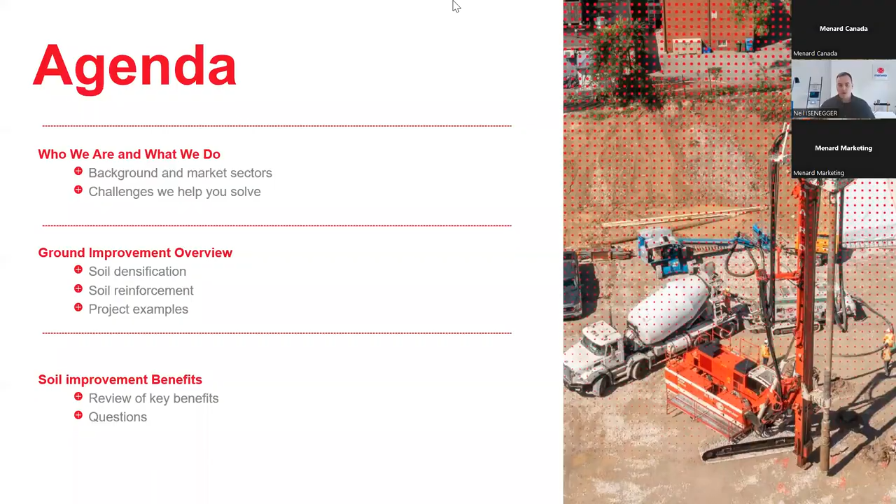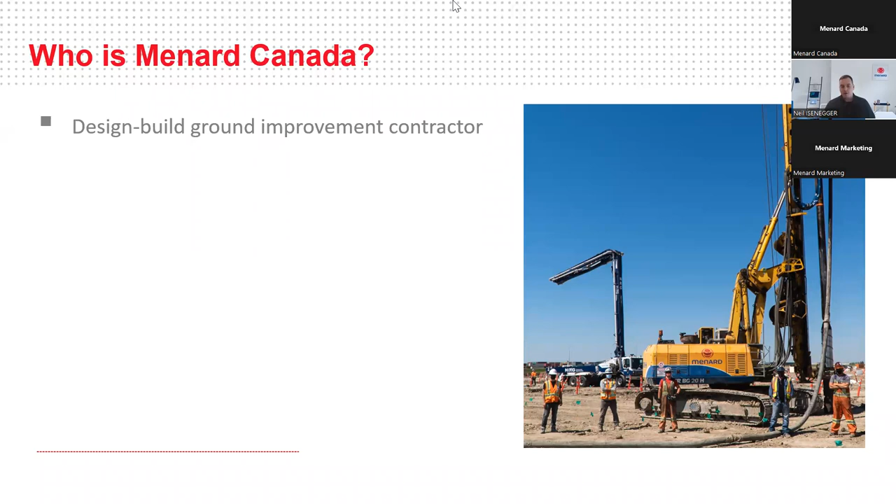So Menard Canada, who are we? What problems do we solve? Menard is a design-build ground improvement contractor, formerly Geopac here in Canada, established in 1971. Geopac was the first licensed user of the Menard pressuremeter here in Canada, a technique invented by Menard's founder, Louis Menard, back in 1955, and patented that same year.

There's been quite a bit of development since, and this was a revolutionary way to better understand the in-situ strength and stiffness properties of soil, allowing us to treat them in ways that didn't require massive bulk excavation of poor soils or more costly deep foundation systems.

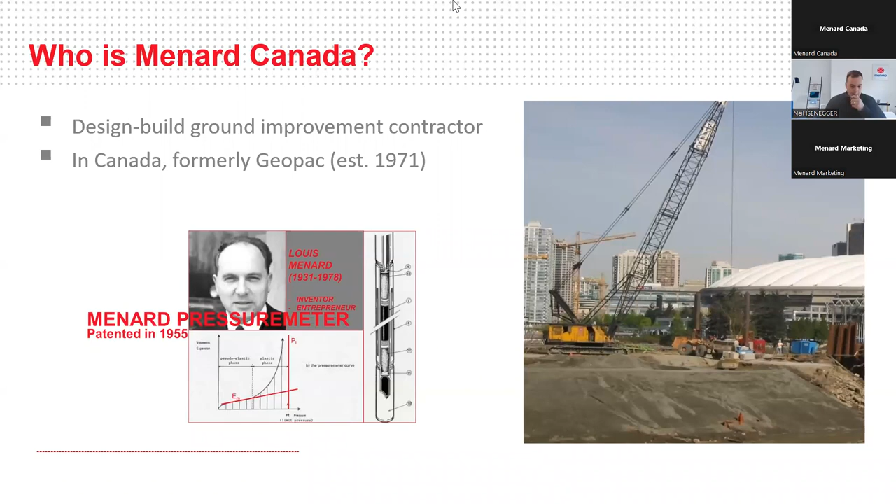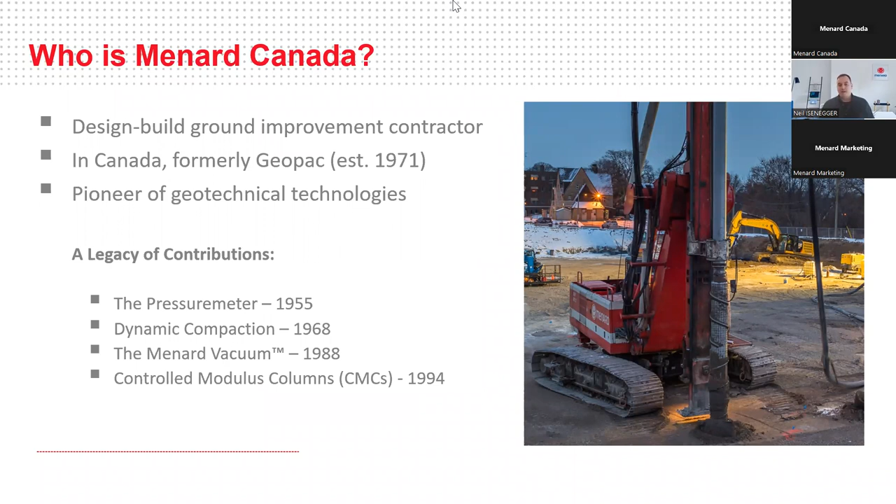So this instrumentation opened up a lot of opportunity for techniques like you see here, dynamic compaction - we'll explain what that is. That's an exciting project in Vancouver from back in our history. Menard Canada has pioneered a lot of geotechnical technologies here in Canada: the pressuremeter, of course, brought in 1971, dynamic compaction followed after that, Menard vacuum, which is a consolidation technique for dealing with soft soils, and then controlled modulus columns, when we start getting into concrete-based ground improvement methods, in the mid 1990s.

Currently, Menard Canada has several offices, coast to coast. We're your ground improvement team, whether you're out in BC, the East Coast, or anywhere in between - offices in Vancouver, Kelowna, Calgary, Hamilton, where we're presenting from today, Toronto, Ottawa, and Montreal, with great teams of folks here that are very approachable. If you have any questions after this, or would like to talk with someone more local, check out our website, there's contact details there. Don't hesitate to reach out, you'll be in very good hands.

So what type of jobs do we get involved in? When it comes to ground improvement, we're focused on soil conditions, which could be below buildings, below roads, railways, industrial facilities, even marine facilities, ports, airports. The application is really almost as wide as would be available. If you have poor soils, there's something that may be able to be done more effectively, and we'll get into how we manage that in a second.

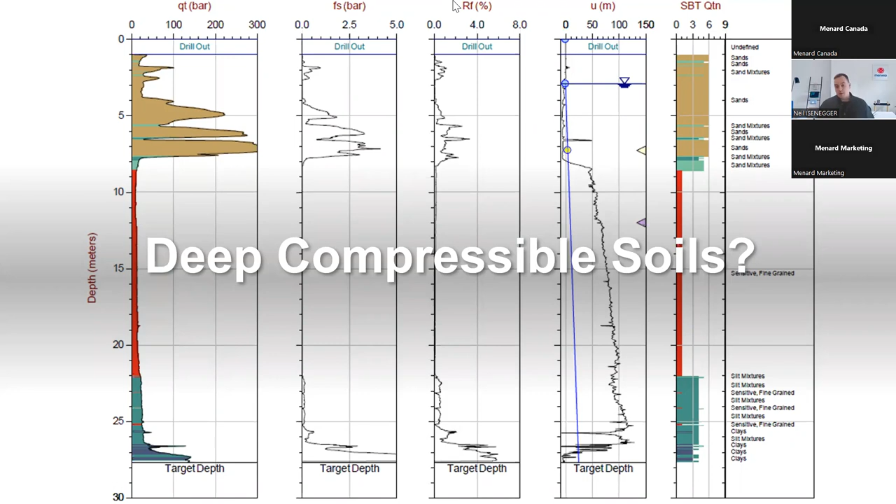So before we get into the creative solutions, let's talk about some of the traditional techniques. When you have challenging soils on your site, typically your recommendations are going to be to bulk excavate, removing all that poor soil and replacing it with engineered fill.

This is a technique that works well. It's been used a lot on a lot of projects all over the world, but it does have some associated costs, challenges, and risks with it.

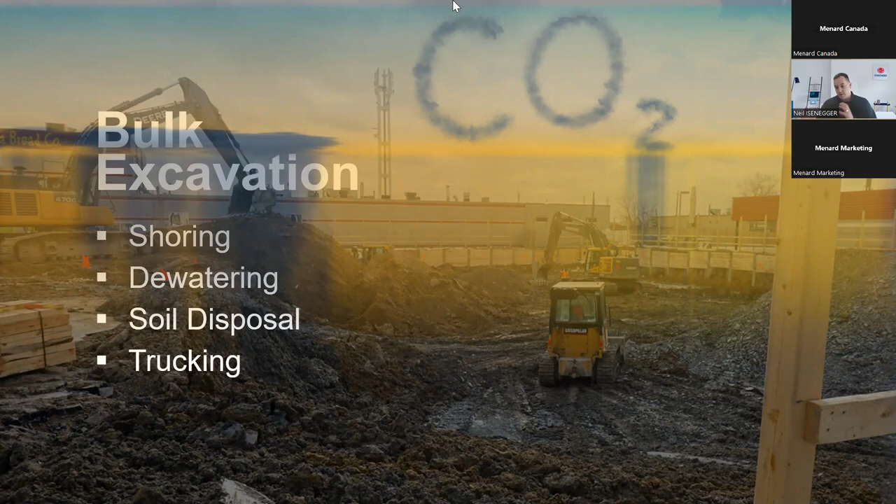You might have high groundwater conditions that force you into dewatering, again adding cost and complexity to the works. Now you're also adding soil disposal and trucking, which not only congests the road and upsets local communities, but also generates quite a lot of carbon emissions, which everyone is very focused on now—understanding what our carbon emissions are, where we are now, and how we can get them to a level significantly lower than where they've been in the past.

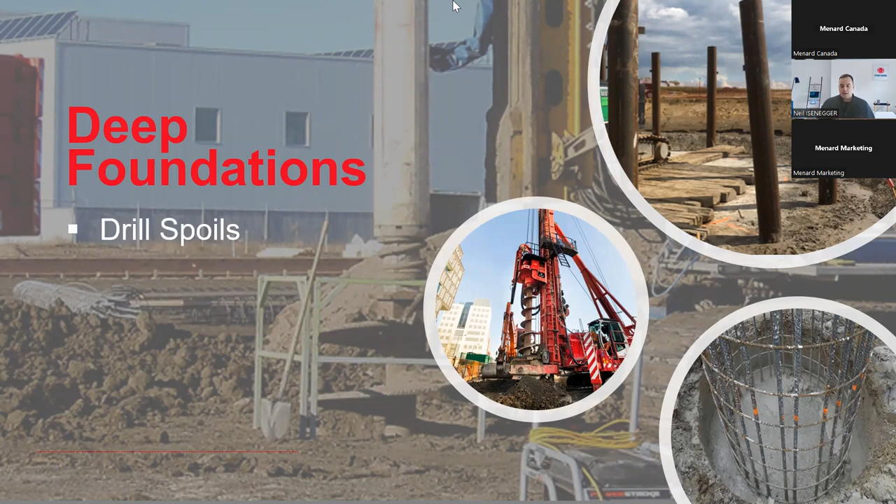The other option you're often presented with would be deep foundations—whether this is a driven pile, maybe a helical pile, drilled caissons, or continuous flight augers. A lot of these methods, not all of them, but a lot of them will generate drill spoil, so you're still pulling up quite a lot of material out of the ground.

That material needs to find a home—that's getting back into the trucking and congestion. They also have higher material inputs in terms of steel, concrete, or grout.

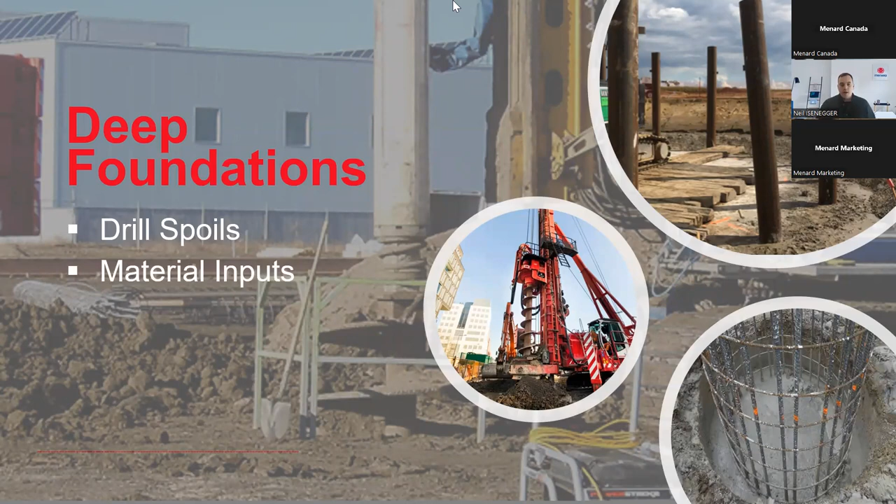And then structurally, they're going to require things like pile caps, grade beams, and structural slabs, which are more costly and take a little bit longer to execute on site than conventional foundations.

So what do conventional foundations look like? Shallow foundations, as you can see in the back, are pretty straightforward—less excavation, fewer material inputs. The idea is to limit the amount of concrete and limit the amount of reinforcement that you need.

Of course, these are going to be dependent on the existing ground conditions. These are faster and more economical to install than pile caps, grade beams, or structural slabs, and they can often be installed by contractors who may not have the same level of sophistication you'd want for more complex piling-type approaches.

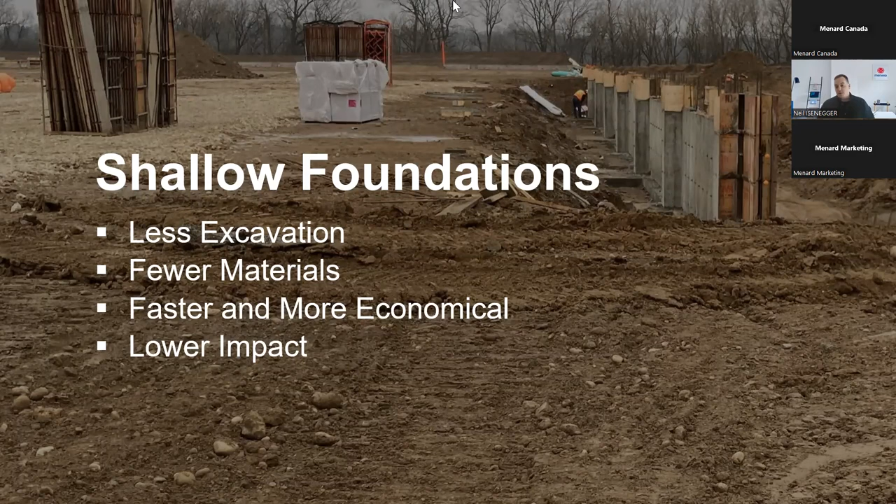Speaking of environmental impact, this is your lower impact option. If you can get away with high capacity strip and spread footings on your project, placed as high in elevation as possible, that's going to be the lowest impact to the environment, the lowest impact to your project costs, and the lowest impact to your project schedule. But could this be a reality?

Could shallow foundations be a reality when you're dealing with challenging soils on site? That's where ground improvement comes in. So let's take a bit of a step back now—we've introduced the topic, let's talk a little bit more deeply.

What is ground improvement? It's a name used to describe a number of construction techniques that use mechanical means to improve poor soil conditions.

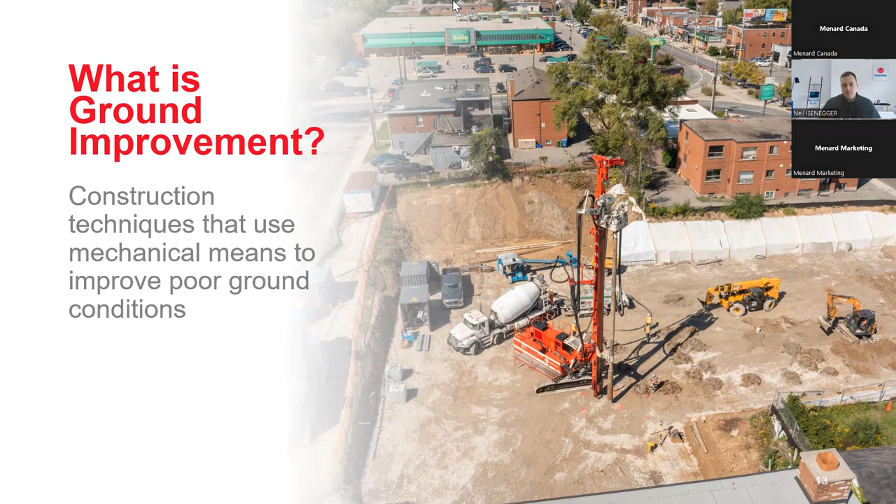You may be looking to improve the strength and stability of your site. Perhaps you have a concern about the total or differential settlement that would occur if you're going to place a new building on poor soils—maybe it's a roadway embankment, a retaining wall, or a new storage tank.

You may also have concerns with loose soils having liquefaction potential—seismic events causing settlement challenges—and, as mentioned with retaining walls and embankments, making sure the site has the stability to support those embankments without failures. I think everyone has probably seen some examples in the world of these kinds of failures.

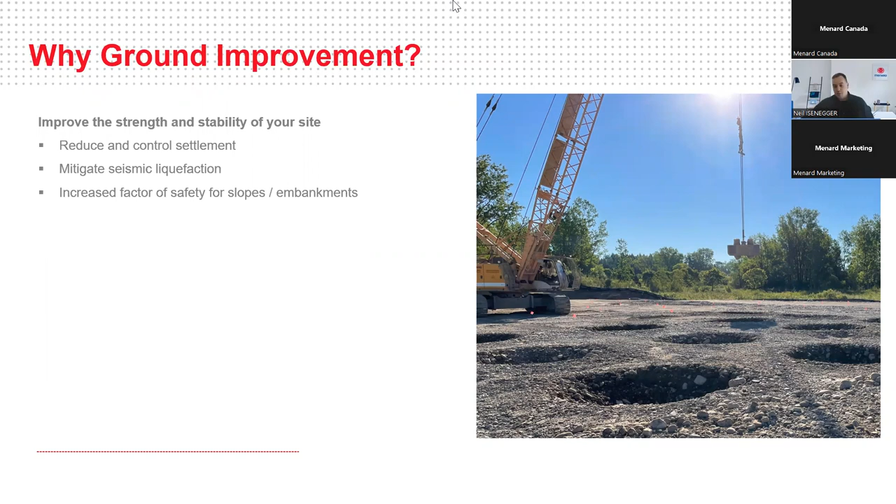The idea here is if you can manage the risk below what you're trying to put on using techniques like ground improvement techniques, you can save a lot of time and money, but you can also achieve what you're trying to do in terms of project performance and the long-term stability of these sites.

Ground improvement also allows you to simplify your construction. If you significantly limit the amount of excess soil generated from a bulk excavation or a drilled caisson, that means less trucking off your site and less coordination. Here in Ontario, the new excess soil regulations are very prescriptive about how you have to manage excess soil, so the less of it you generate, the easier it is, and this generally correlates directly with the economic impacts of the project.

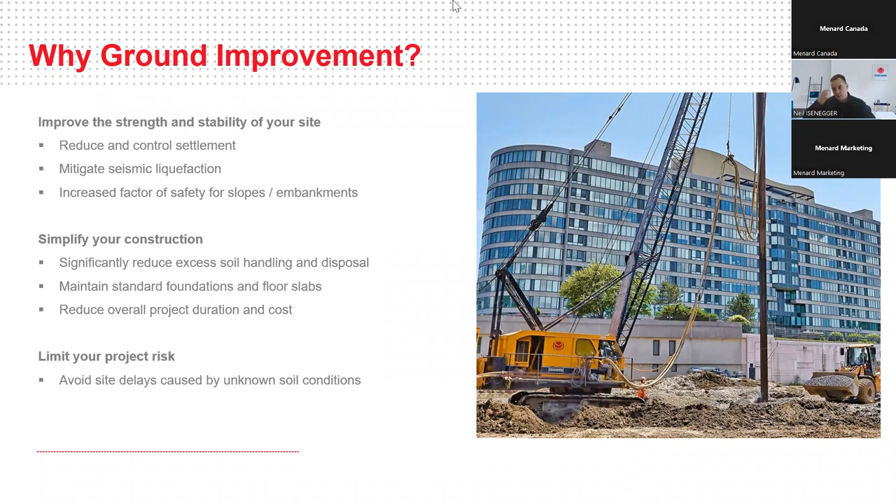The bigger one, I think, is just limiting your overall risk. Anytime you're dealing with the ground, there's always inherent risk. There's no way to know 100% of everything that exists below a building or below a property. If you can reinforce, strengthen, or stiffen that, homogenize the site and make it all consistent, you reduce a lot of risk on your projects. That means when you go to construct, you're not coming up with surprises you need to manage, which are often more costly and have significant impacts to projects in terms of delays and economic factors.

There are a lot of different ground improvement techniques. We won't have time to cover them all today—this is more of a general overview of some of the main techniques being used here in Canada. These methods can generally be broken down into reinforcement techniques, where you're adding some sort of material into the soil to improve its properties; densification techniques, which use energy to change the nature of the soil; or consolidation and drainage techniques, which help on compressible sites when you have soft clays and you're adding new load and worried about long-term settlements.

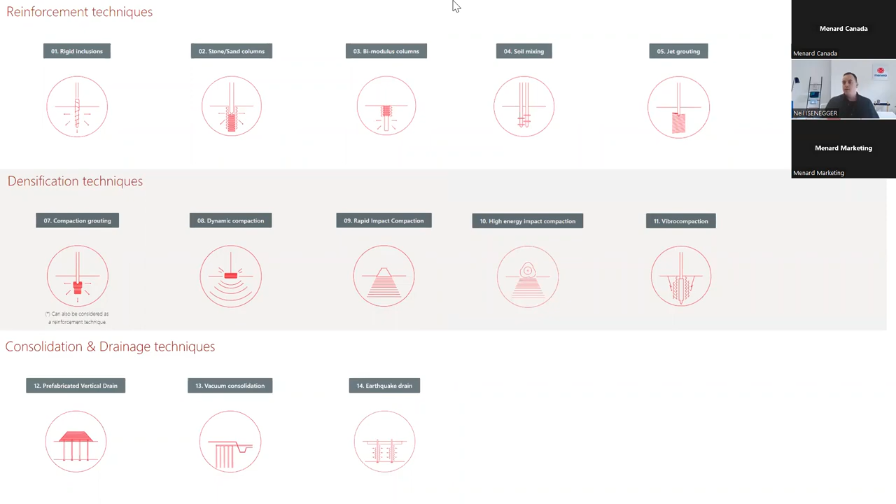So we'll talk quickly first about soil densification. The idea here, as we mentioned, is to simply stabilize loose soils. This could be viewed as your engineered fill or your bulk excavation, really without ever putting shovels in the ground. Instead of removing all this soil, putting it back in lifts, or bringing in import material, you can densify what's there in place, get to the same capacities, and save a lot of risk on the site.

There are a number of different ways to do this, and we'll show a couple of options where the energy increases as we go. What you see here first is a system called rapid impact compaction. This is generally a 9-ton hydraulic hammer that can strike a 5-foot diameter tamper foot in contact with the ground at a rate of about 40 times a minute, which can treat loose fills and loose sands to a reasonable depth below that tamper foot.

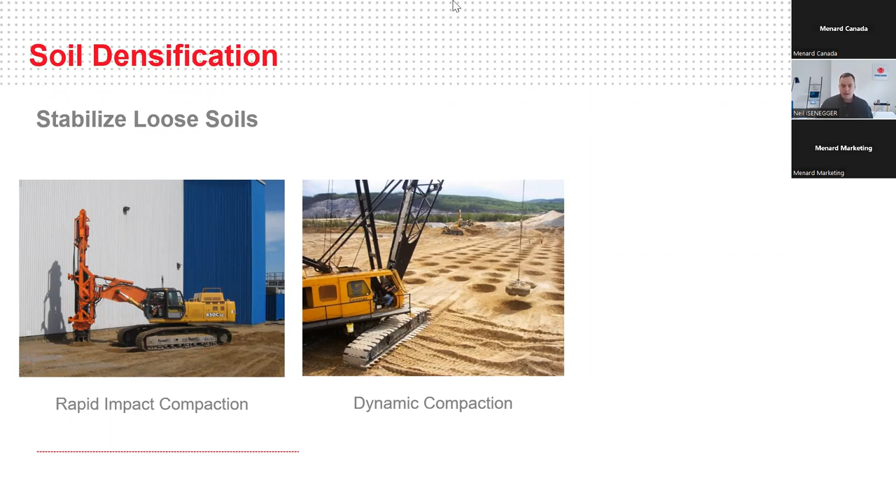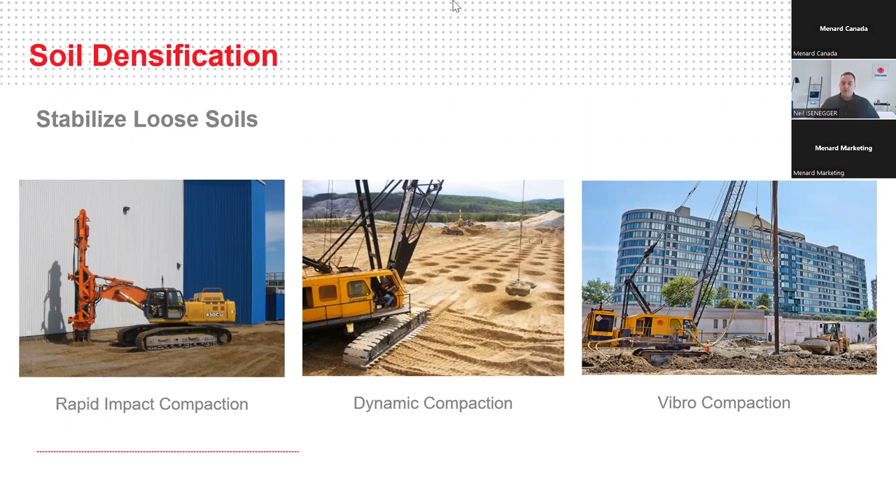As the energy increases, you get into techniques like dynamic compaction, which we mentioned was one of the first ground improvement techniques brought to Canada by Menard, when we were formerly Geopac. And then vibro compaction—so again, going from excavator-mounted equipment into medium-sized cranes, to maybe larger-sized cranes, to manage different risks and different soil profiles.

I like this graph because it gives a sort of indication. We talked about the increase of energy, but what you can see is your typical roller compaction, or that heavy proof roll you do on site, may densify the upper foot or two of the soil. Rapid impact compaction, for example, will extend that to maybe 5 or 6 meters in the right soil conditions. Dynamic compaction allows you to double that treatment depth down to maybe 12 meters or deeper. And then vibro compaction...

Vibro compaction really is, if you've got soils deep enough and a crane with enough cabling, you can get the job done. Our teams on the West Coast are doing a lot of vibro densification to manage liquefaction risk throughout BC, and a lot of their techniques are going down 20, 30 plus meters using vibro flots on cranes.

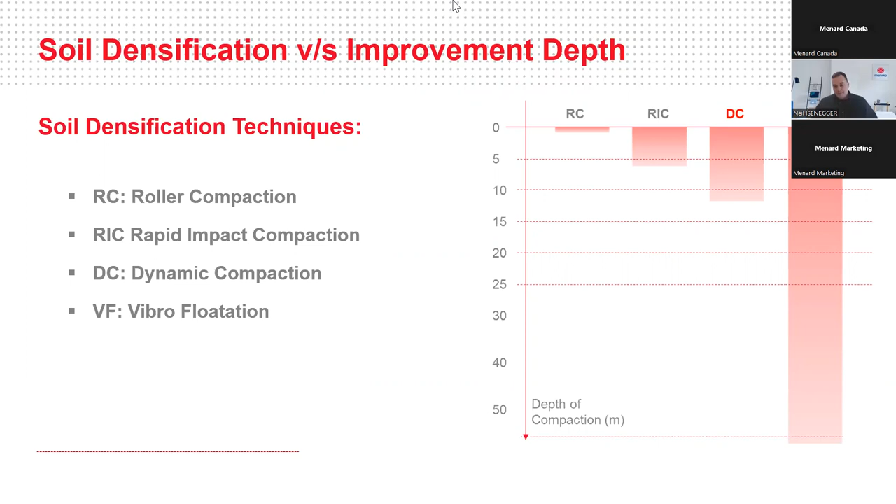So a quick example here—this is an industrial warehouse in southwestern Ontario. This site was a former gravel pit. I think there's starting to be a bit of a trend with some of these former pits and quarries being redeveloped and turned into some beneficial use, which is really great to see—a lot of awesome opportunity there. But this particular site had about 5 meters of fill that had been brought in, plus some weak soils below it.

Dynamic compaction was used to densify the entire site, plus some new fill that was required to bring it to final site grades, and it avoided over 75,000 cubic meters of removals. Think about the number of trucks needed to haul this material off, or the equipment required to manage sorting and recompaction of this soil, versus placing a single crane on the job site working for a couple of weeks to get the job done.

We did a very detailed carbon emission analysis of this project using a third-party calculator available from the Deep Foundations Institute online. Folks can look that up if they're interested in knowing the carbon emissions of their projects, maybe comparing piling solutions or dig and replace with ground improvement options. This particular site had less than one-tenth the carbon emissions of the proposed earthworks, and in fact much of the emissions generated were from the earthworks process to upfill the site prior to compaction, which was calculated in that analysis. So this can be a big impact.

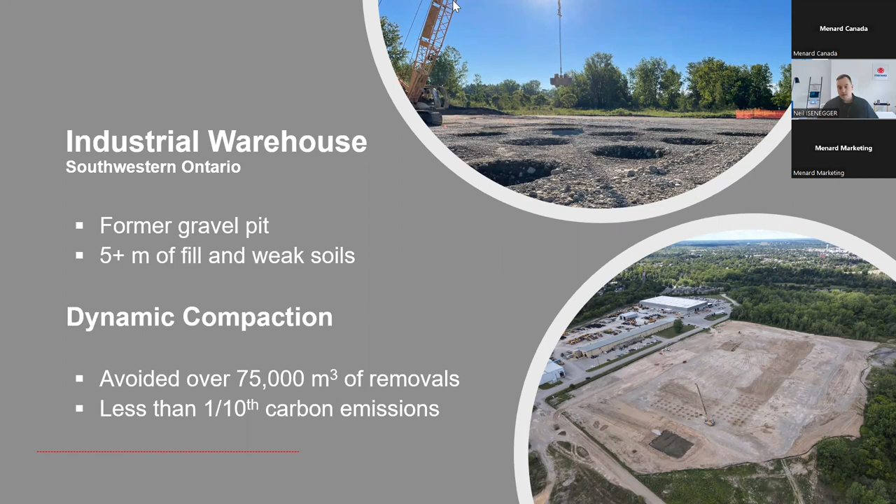Another distribution warehouse, this one in Toronto, a very large warehouse. Again an old dump site, only about 3 meters of poor soil, so we're getting into a shallower depth which allowed us to use a rapid impact compaction technique. We avoided the removal of 150,000 cubic meters of soil - significant volumes of material that can stay in place and doesn't need to be moved off site or sorted and rehandled. The entire process provided increased bearing capacity, supported all of the foundations, the heavily loaded floor slabs, racking loads, and significantly reduced or eliminated the settlement risk on the site.

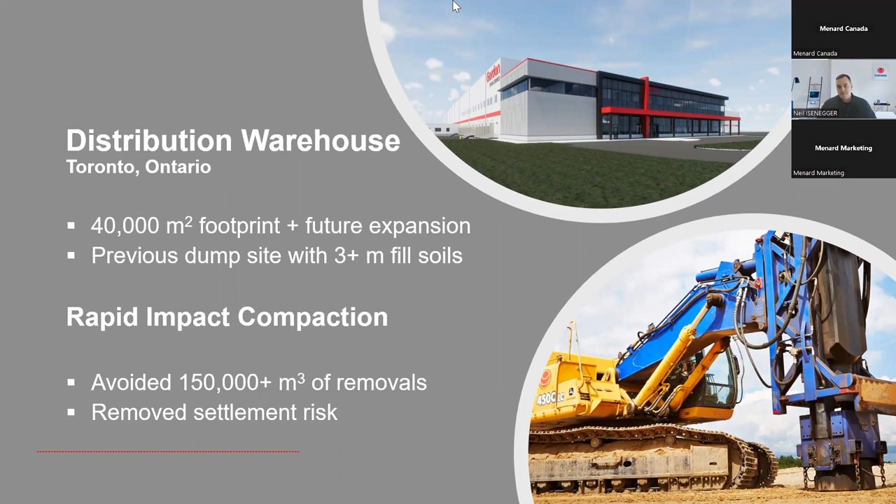We'll likely show a number of structures on this presentation, but that's not to say we aren't doing work in storage tanks and infrastructure projects. This would be a great example from our team in Quebec of a roadway embankment. This was a new road being built to service a new residential development. It had quite a variable thickness of mixed fill soils underneath it, and dynamic compaction was used to densify the upper 7 meters, providing the strength and stability to accept the load from the new embankment without excessive settlements or long-term concerns with performance of that road.

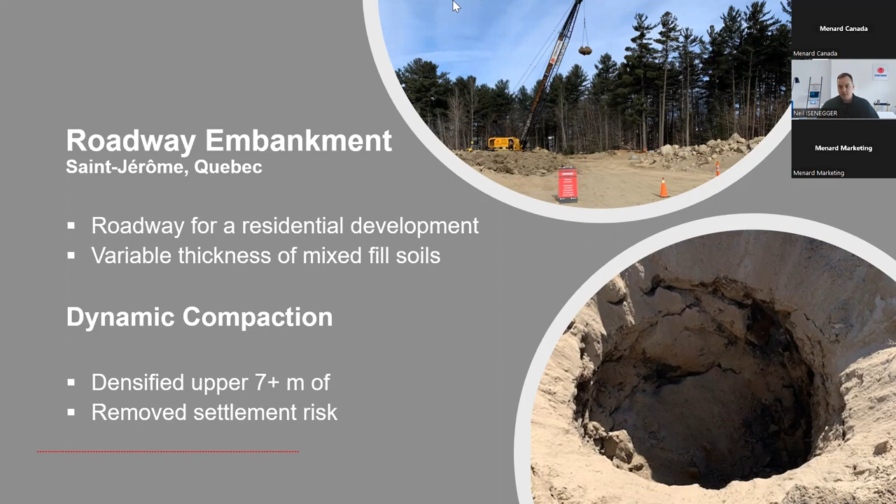So I mentioned soil densification techniques - this is when we're simply adding energy into the ground. Now we're going to chat a little bit about soil reinforcement techniques. The difference here is we're starting to use material inputs to modify the strength and stiffness parameters of the in situ soils.

The first one we'll talk about is what we call aggregate piers. This is sort of a catch-all term for a number of different installation methods. We can go on the very deep side, with crane-based units that can treat over 30 meters of poor soils, allowing us to inject and compact that granular material deep into the soil profile.

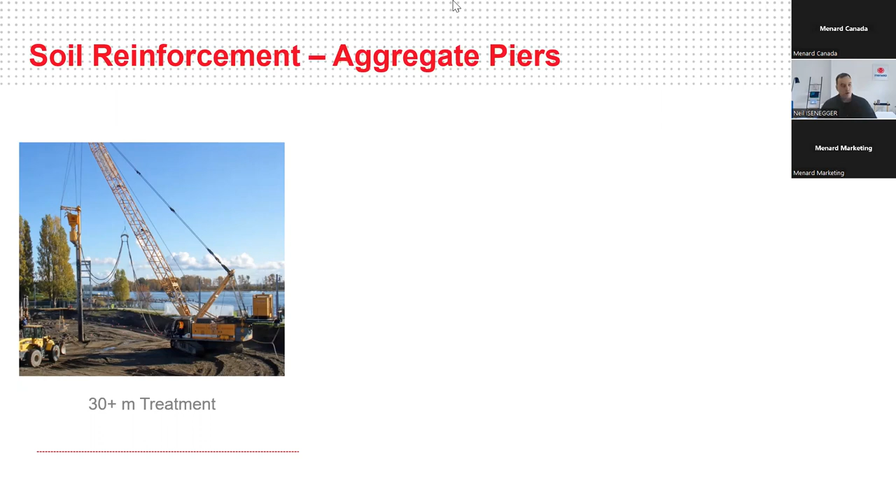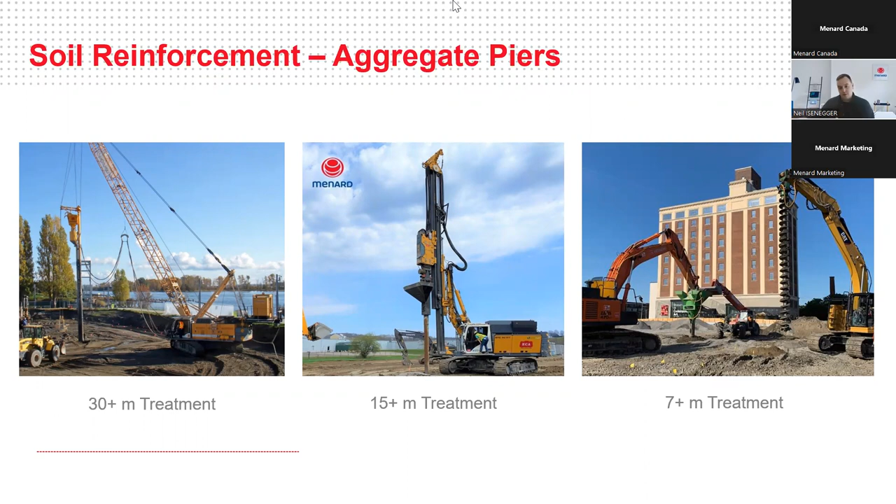This is a great photo from one of our teams out on the West Coast. We have techniques carried on more of a medium-sized sheet piling type rig, limited to about 15 meters of treatment depth. And then we have tooling that can be easily adapted to available equipment for managing relatively shallow treatment depth. The idea here, again, when we talk about carbon emissions, sustainability, cost, schedule - if you can bring the right piece of equipment to a job to treat the soils, you're going to have the lowest possible cost and the lowest possible impact to the environment.

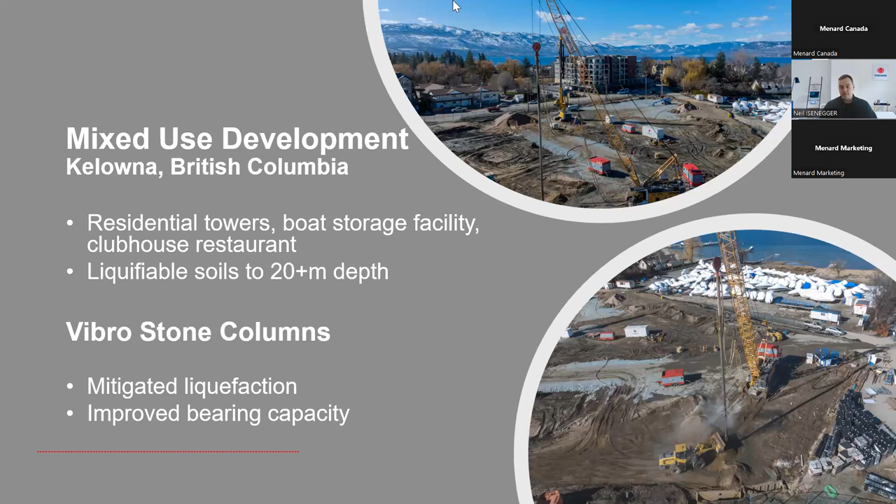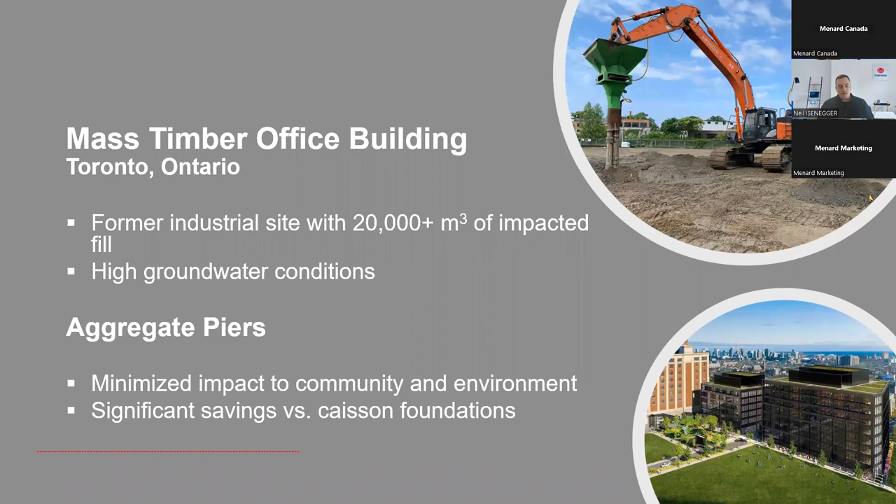So next we'll talk about controlled modulus columns. There's a number of different ways that we install this. You'll see photos of rigs that are quite large, down to techniques that can be hung off of excavators as small as about 35 tons. And this is when we start getting into concrete or grout.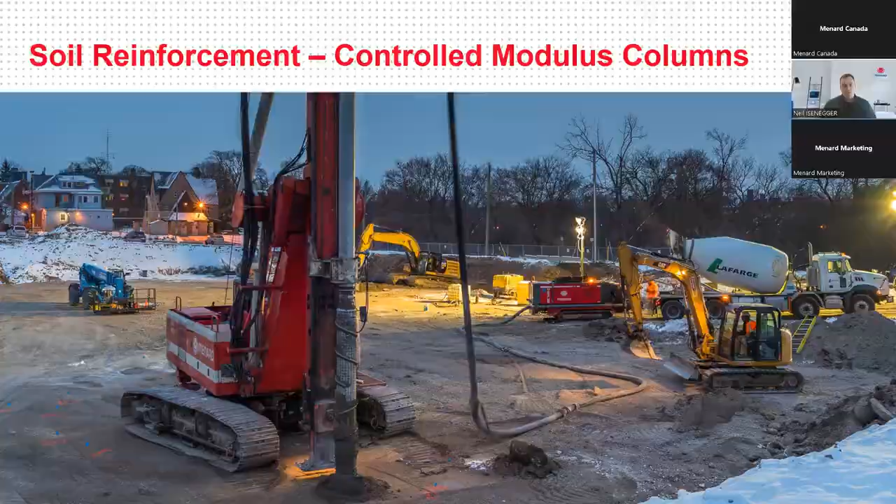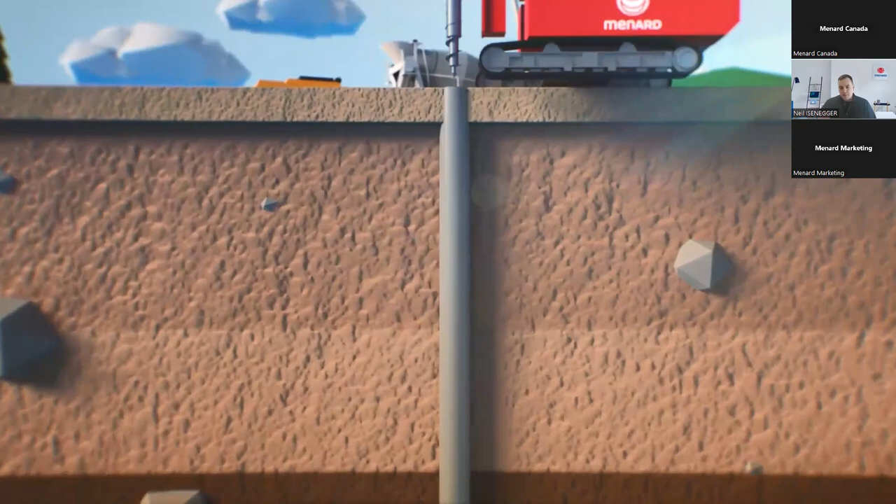Just a quick animation here to help visualize the process. We use a displacement auger, a high torque drill rig, to squeeze our way through the compressible soils and into more competent material below. We then pump, under a controlled limited pressure, a concrete or grout product from the tip of the tooling and bring it up to the surface, where we can then cut it off at its required elevation, setting the height of those elements so they can support a foundation, an embankment, or a tank.

Design methodology here: these might look like piles, they might smell like a caisson, they probably taste like them as well, but this is not a pile type solution. The big difference here is that when it comes to ground improvement, we're looking at a sharing of the stress between the existing soils and the reinforcement elements that have been installed.

So we're saying the soil that's there is poor, it's not enough on its own to accept the new load, but it has some capacity. It's not worthless. Let's use it to maximize its potential, and whatever it can't handle, let's balance that out with some reinforcement.

What you can see here is an example of a classic rigid inclusion, where you have a foundation on top of a load transfer platform, typically a granular mat placed between the underside of the foundation and the top of the controlled modulus column elements, versus a deep foundation like a caisson or driven pile, which has a pile cap that puts 100% of the load into these pile elements, and that typically means you need to extend them a lot deeper than you would with controlled modulus columns.

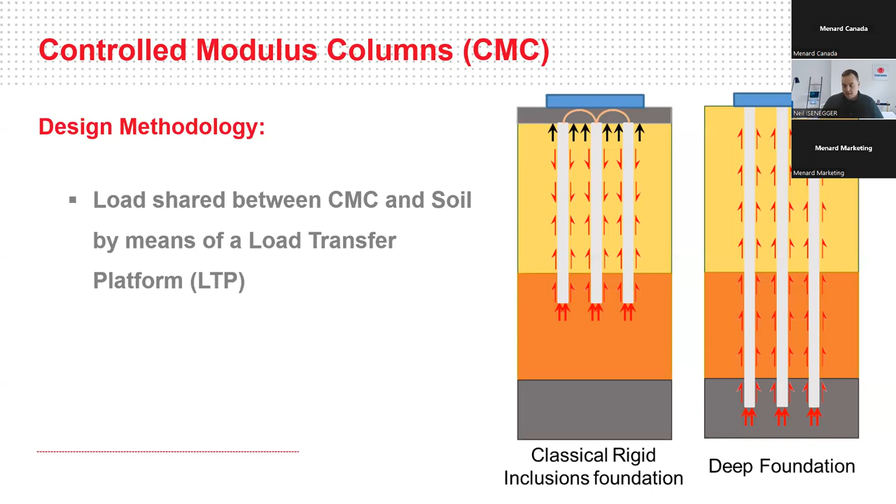The game here is different. When you're dealing with deep foundations, the game is to get the maximum amount of capacity out of each element that we put in the ground, because there's such a high cost to each one. With ground improvement, it's saying we don't need to go shooting for the moon on capacities. We want to put them in the ground as fast as we can, because that's what allows us to be more economical and offer a lot more value.

A little bit on the installation. I think what's really neat about controlled modulus columns is that these are no vibration systems. So very much like caisson drilling, we can install these very close to existing structures. We'll show some examples of installing these next to heritage buildings. Being fully displacement, you're not generating any drill spoils that would then need to be managed or disposed of by the contractor. It's also relatively quiet, you sort of have the cycle of a concrete pump, the whine of a torque motor, and they get significant treatment depths.

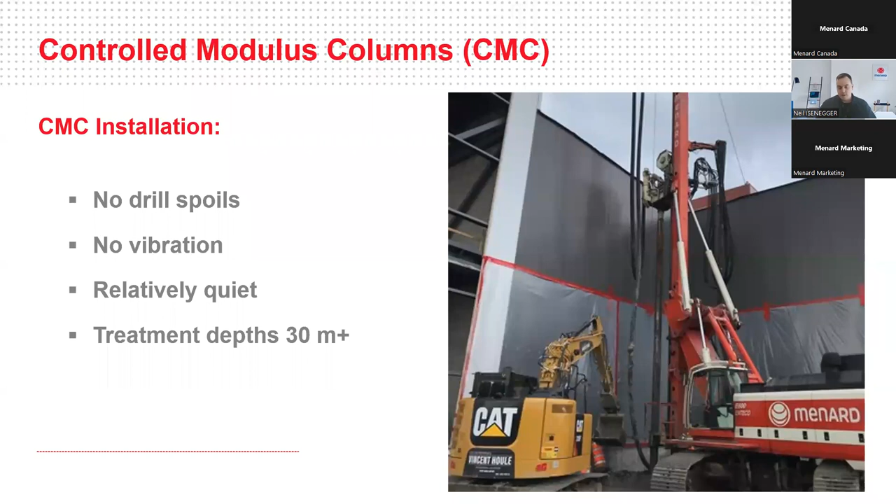Because you're using a rotary drill rig, you have the ability to add extensions, Kelly bar extensions, onto the unit, and install to depths greater than the height of the equipment. A lot of equipment that's vibratory driven, for example, will be limited by the height of the mast in terms of installation depth. That's not the case with rotary drill rigs, and that allows us to tackle some soils that are below that 15-16 meter depth, where a lot of other techniques tap out.

Using drill rigs also gives us a pretty neat advantage from an engineering and quality control standpoint, because there's a lot of great data that can be pulled directly off of the sensors of this equipment. It allows us to get real-time monitoring of all of the drilling parameters, our torques, our rotations, our moving speeds, and all of this gets uploaded into the proprietary Menard Omnibox data acquisition system.

This is a very neat tool that allows us to do a lot of project pre-planning, and upload that into the rigs. Our operators know where they are, what element number they're at, what the expected depths are. They can see the full response of all of the drilling to ensure that we're putting in the exact product.

That we're intending to. Of course, anytime you're using concrete, you're going to want to do compressive strength testing to ensure the mix that you ordered is what's being put in the ground. And you can also run full-scale static load testing on these to verify the results.

I really like full-scale load testing with controlled modulus columns because it allows you to actually put load through the entire profile. When you perform static load testing on an aggregate pier, for example, if you have a limited concrete cap on top of that aggregate pier, maybe a 2-foot concrete cap, and you're trying to record its stiffness parameters, it works well to understand what the upper 2 or 3 meters of the soil looks like. But a lot of times we're treating soil that's significantly deeper, and there's a real gap in the understanding with load testing on aggregate piers below the depth of influence of that load test.

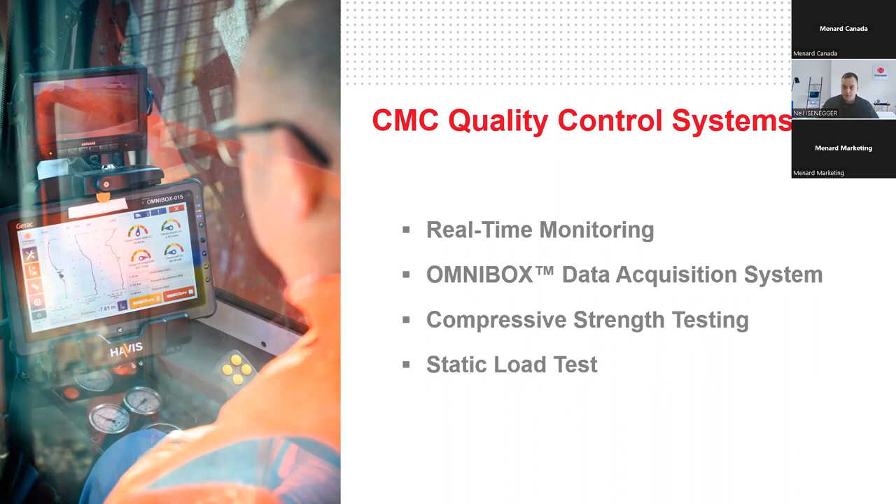So here'd be an example of one of the taller structures that we've done here in Canada. There's a 15-story mixed-use residential just down the road from me here in Hamilton. This site had, again, impacted fills, some weak sands below that. There was a high water table. In fact, the site was designed such that it would be half a meter or so above the long-term groundwater table to just stay out of that.

And then there's some adjacent heritage structures, which you sort of see in relief in the background photo on the left. This entire development was supported on a raft on controlled modulus columns that extended through the fill, the weak soils, to tag into the better material below.

Nearly eliminated all of the dewatering. There was a little bit of dewatering needed to put in the elevator pit. It greatly minimized the shoring requirements by limiting only as much as was necessary to put the raft in, and avoided 15,000 cubic meters of removals of impacted soil, which would need to either go for treatment or to a landfill.

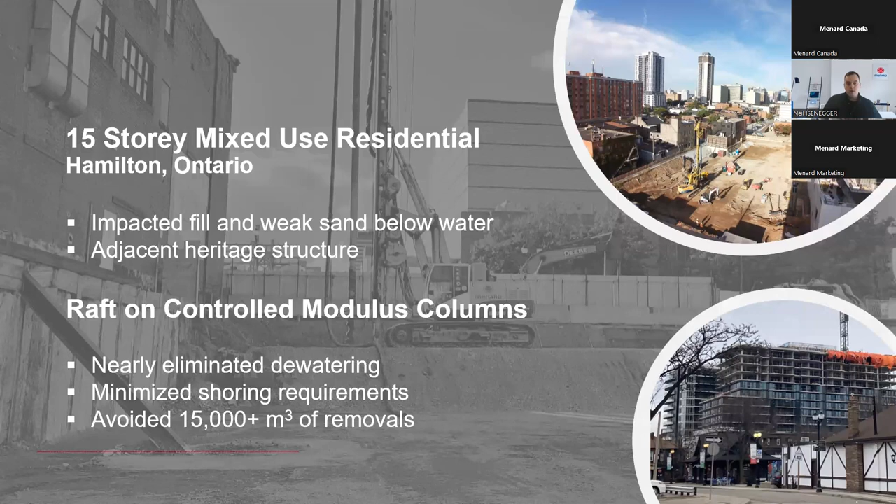It's also a lot of fun to show, here's a 15-story residential building, here's a lot of big work and big equipment.

And the challenge is always the same. There's some sort of unsuitable soil condition. There's concerns about settlement, bearing capacity for these structures. And they're looking for options that avoid some of the cost and expense of some of the traditional methods that we've already talked about. Working with controlled modulus columns, we're able to reinforce the soil, give a reasonably high bearing capacity.

Of course, these buildings aren't very heavy, but we can keep with the standard footings. So what that means is you can stay with relatively low complexity trench and pour foundations. You can keep with your typical foundation contractor that you're used to working with, that may not have as much experience with pile caps and grade beams, some of the complexity in the tying of the rebar and the forming of those elements.

We can also support the standard floor slab. So often these are on the order of 100 millimeters or 4 inches thick on some granular. And this allows for future modification, which wouldn't be available if you had structural slabs on your site. So someone occupies the home, now they want to put in a new washroom in their basement, or for some reason they need to get below the slab. It's a relatively easy process to chip that slab up, install the servicing, and then reinstall the slab without having performance issues.

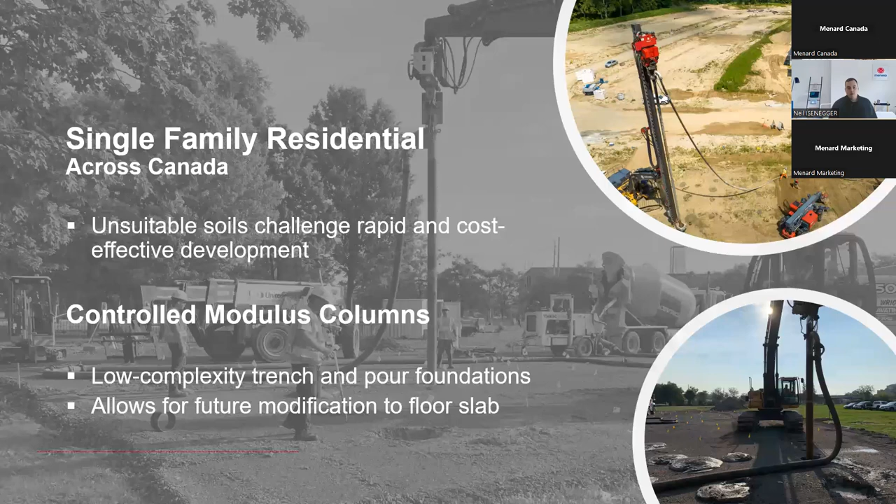I guess back to some big projects. This is an Amazon warehouse with our team in Calgary. This was a very cool project, very aggressive construction schedule: a 4-level, 65,000 square meter distribution warehouse.

So significantly big. You can see in the bottom right photo some of the foundations here, and the grid that was being done. Menard started the project with controlled modulus columns, carried along. The excavating contractor was digging up right behind us, and the forming contractor was right behind him. Everyone chased themselves around the site, and we were able to offer a lot of value.

This particular job had originally been designed for an aggregate pier solution. Menard was able to work with the winning contractor on value engineering using controlled modulus columns, which saved a considerable amount of cost and was also faster to construct.

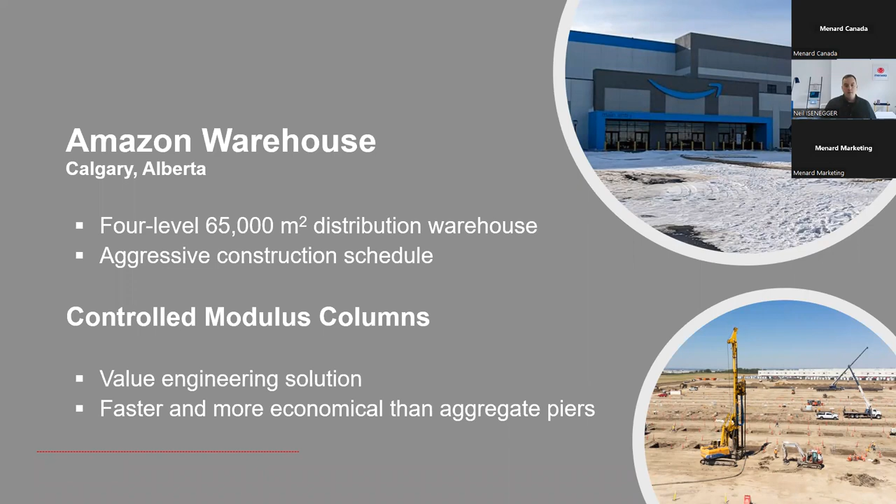Now going back to sort of the small side, another warehouse, but this one was under construction. We identified a pocket of saturated fill. We're sort of back to one of these gravel pit redevelopment sites, and there was an area of the site where some very saturated silts and clays had been dumped. This had an impact on the site of only about 100 meters of wall.

Foundations for most of the building were already in. Menard got the call and they said, is there something we can do to avoid digging this all out, avoid going to some sort of piling system? They did look at helical piles on the job, but ultimately the controlled modulus column system, installed with very small equipment, was able to maintain the foundation design. So no change to the rebar that they had ordered, no change to the forming, and the entire works, all the concreting, was actually completed in about one day.

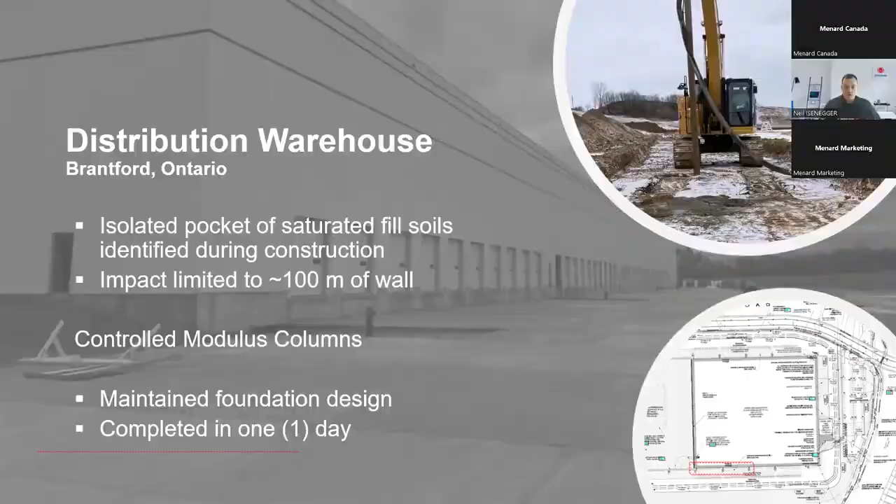So let's talk about some of the proven benefits. We've mentioned some of these already, but we'll give an overview of the impact of working with ground improvement. I think the main one is to significantly reduce soil handling and disposal. Anytime you're dealing with moving earth, there's cost associated, there's time associated, there's risk associated. You're also bringing that through communities, and the trucking of that material is generating a lot of carbon emissions. Anytime you can reduce the amount of soil that you need to move, it's a win for everybody.

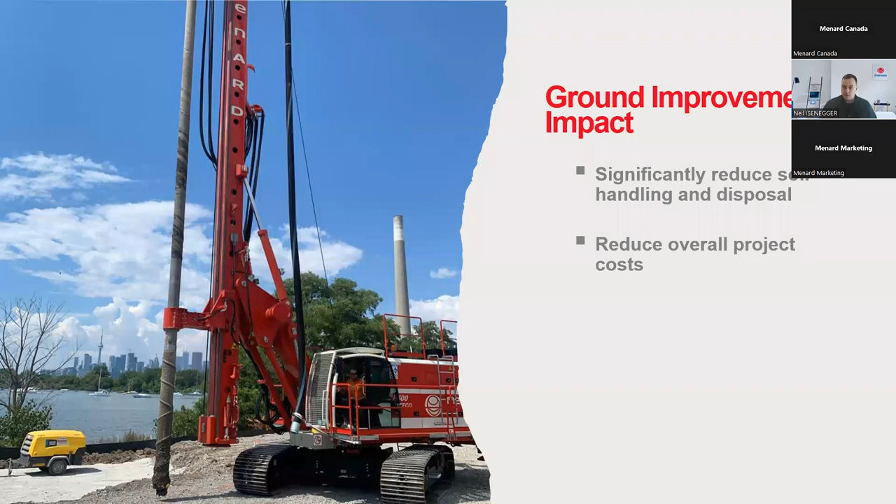This also allows you to greatly reduce the overall project cost. We've shown a number of examples of that. Maintaining standard footing construction — again, if this is on that small residential job, it allows you to maintain that rapid trench and pour on larger projects. Even if it's a raft foundation, you have no elements coming up into that raft creating perforations. It's a very simple process. When your contractor comes on site, it's like they had good ground to begin with, and they're just building, removing all that risk and uncertainty.

That's also often associated with the soil conditions. Again, if you're using systems that are faster to construct, that has a positive impact to your project schedule, but also removing the risk from the site has a positive impact to your schedule as well, because you're not going into construction and finding unknowns, finding challenges that now need to be managed, and putting delays in your schedule. Schedule can drive a lot of projects, especially once they get going. There's a very specific sequence of events that needs to happen to meet the timelines, and any sort of hiccup along the way can be really detrimental to the overall success. Ground improvement removes that risk and lets you get on with your construction.

And of course, a major benefit to project sustainability — often we're seeing 1/10th to 1/20th the carbon emissions of earthworks operations or piling. This allows us to just be better with how we do construction, I think. It's great to see there's a lot of interest in this these days, and I think for very good reason. We're quite happy to be part of the process of tackling some of the challenges with carbon emissions and overall project sustainability.

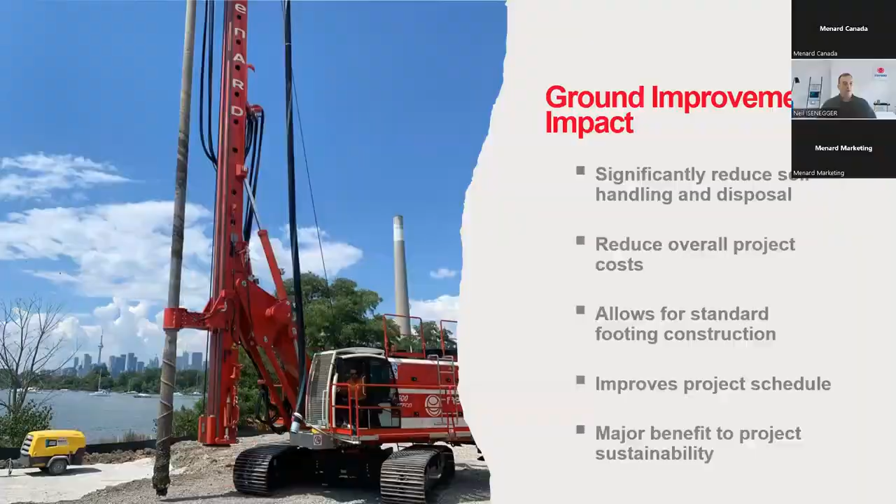So we'll go to a couple questions. I've just got a few here from the Q&A. We will try to summarize some of these and return with direct questions at a later date. The first one is: what is the impact on existing structural foundations with dynamic compaction?

That's a great question. So you have an existing building and you want to look at doing dynamic compaction, maybe for a future expansion or an existing building nearby. Depending on the technique and the energy you're using, there are certain offsets that should be maintained. With rapid impact compaction, that might look like 3 to 5 meters. With dynamic compaction, that might widen out a little more, and with vibro, you're able to get surprisingly close.

That being said, what Menard does and what's always carried in our proposal on these projects is to do precondition surveys of any buildings within about 50 meters of where the compaction work will take place. We also do on-site vibration monitoring through a third party to ensure we're not exceeding acceptable thresholds. So thank you for that question.

The next one is: can you dynamically compact uncontrolled clay fill soils? Great question. The answer is maybe. If you use a technique like rapid impact compaction, for example, where you strike the ground at a rate of about 40 times per minute, you run the risk in clays that you'll generate pore water pressure, and can start making more of a mess than providing benefit.